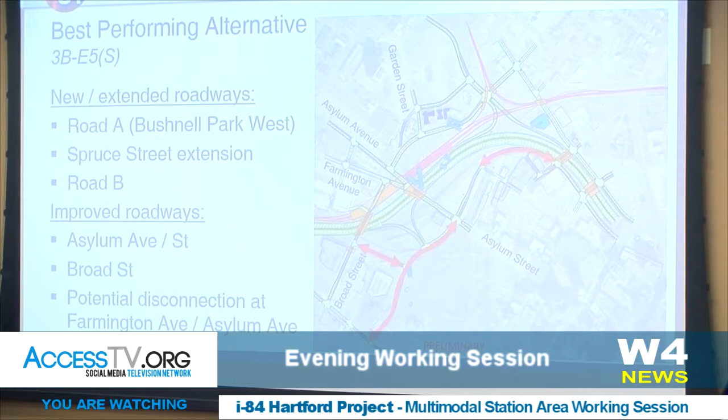So with that, I'm going to turn it over to Tom to talk about some of the ways we've been looking at this to help improve that network, things we could add, things to improve.

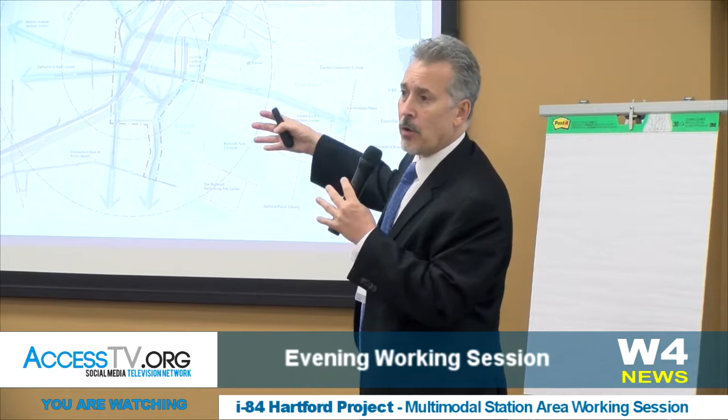There are many more options associated with making connections back and forth, and those connections are very important because they help establish a much stronger sense of place. You want this part of the city to not feel empty, but to feel very much a part of a connected larger city. We want to fill in this area in the middle. The highway comes through, the rail comes through. We want to create blocks, we want to create places for people to gather, we want spaces and streets for people to walk on. We really want to think about this as a new place and create that strong sense of space there.

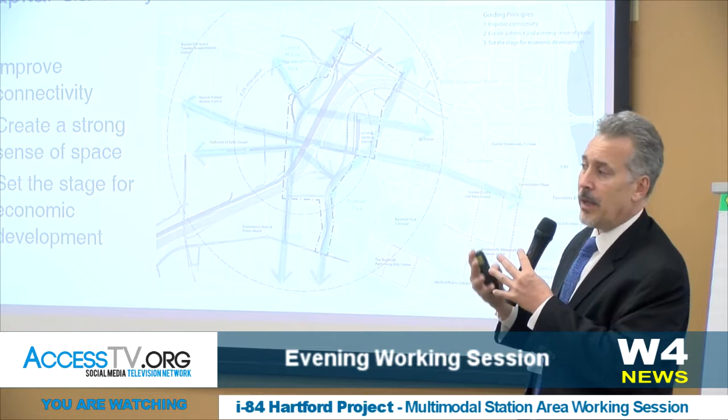That also sets the stage for economic opportunity, really taking what is a downtown that is strong, but enhancing that strength, and also the Hill District, which is also strong, and really bringing those two together, giving a space for development in the middle that can activate both of those communities and create a much larger connected downtown of the city.

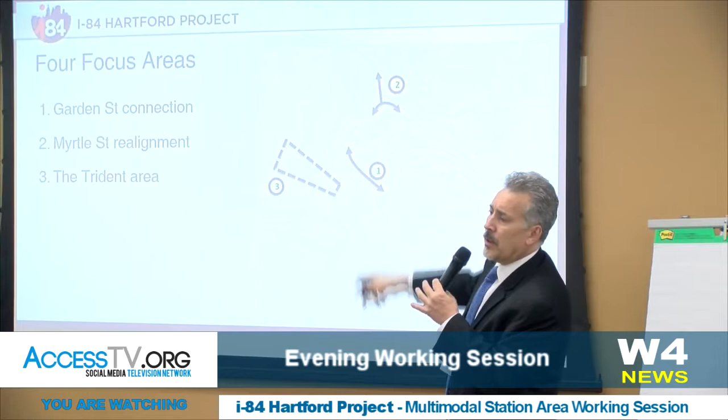In looking at the alternative, there are really four areas we've been able to focus on to think about ways to achieve all of those goals. The first is making a connection north of Asylum, between Asylum and Walnut, that helps build that network in—we're calling it the Garden Street Connection. The second is to reconfigure the alignments of the roads coming in off the off-ramps so we move traffic through the neighborhoods in the north area more effectively. The third is coming up with alternative approaches to how we might process traffic, but also create a great space in the area we all know as the Trident.

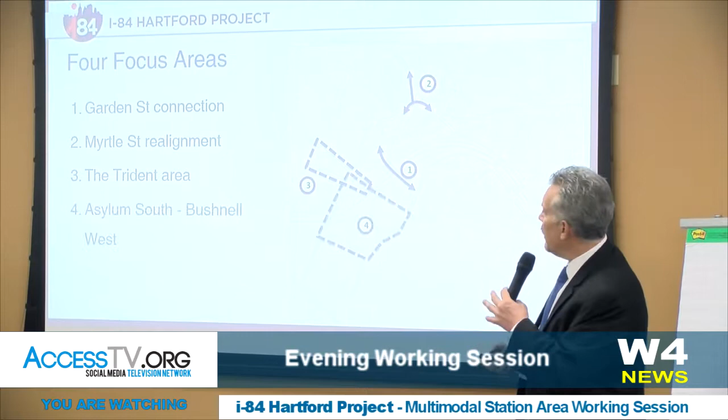And very much connected with that is the area where the ramps to the east are coming in—that's a whole new area, new roads. How can we make sure we enliven that space as well? So those are the four areas we've been looking at from a network perspective, and I'm going to walk you through, with Casey, all four of these.

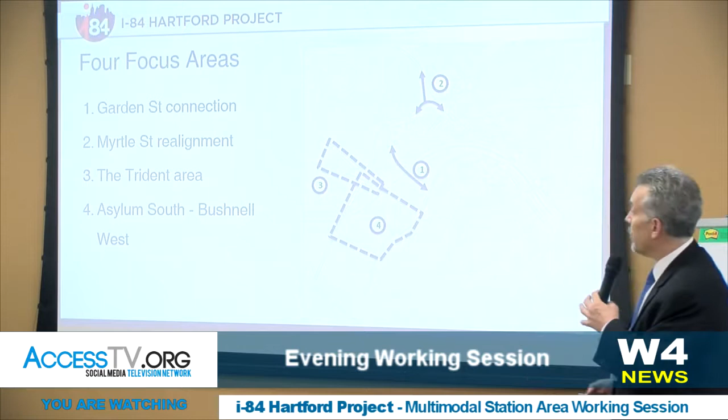So the first is this Garden Street connection. We talked a lot about the fact that between Asylum and Walnut, you really don't have any space to cross from east to west, and that's a long divide that really separates the city in this area. We wanted to make sure we could enhance those connections in a way that works really well for the local street character. Although it's a street coming from the Hill to the downtown, so it's on an incline, we see an opportunity for a local connection by extending Garden to the south and bringing it down, dead-ending into the current Union Station site.

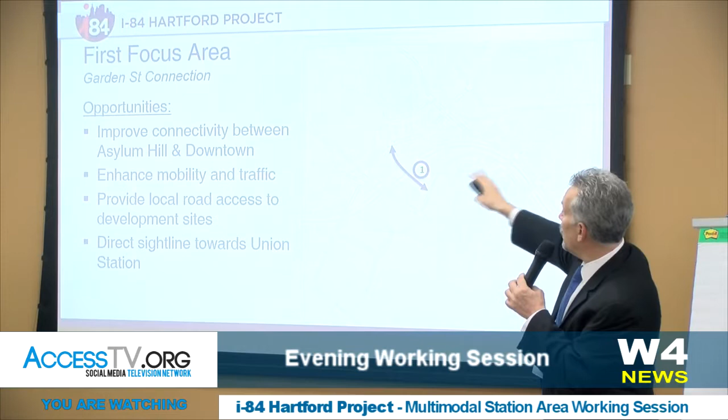We see that site as a very important economic draw for the community, and the Garden Street extension, in a lot of ways, enhances its ability to be a very successful place, and also sets up development just on the other side of Spruce Street around the road that may not otherwise be as effective. So we see some real opportunities by making this first connection.

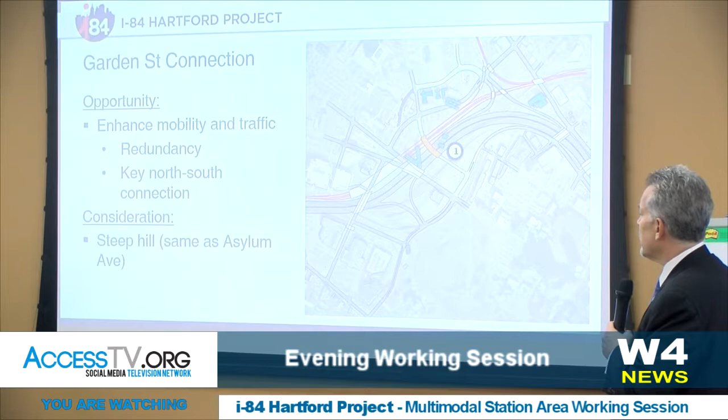Just to support that a little bit, I see some new faces here. This whole idea of creating a connection from Asylum Hill back down towards downtown really started because under the lower highway scenario, the existing way Myrtle Street comes down the hill can't function in the same manner.

So today, Nick, if you could zoom there on your map. Myrtle Street kind of winds down the hill and then goes underneath the highway. So when the highway is lowered, all of a sudden that street is at the same elevation as where the highway would be. So in order to create a connection, we now need to go over the highway and then come back down to meet these streets.

So we looked at this in a few different ways, and I think finally through the collaborative process, we reached something that we're able to make work from a geometric standpoint, because I think we all kind of knew the mobility benefits that were there to be had.

So to confirm what Tom is talking about, it's adding redundancy, and that essentially solves or really helps us elsewhere in the project area—a lot of the Trident area. This is where Asylum and Cogswell meet, where Farmington and Broad meet. That's a problem today; there's a lot of traffic going through there. So by adding this new way for folks to get north to south between the neighborhoods, it kind of pulls some mobility or traffic volume out of that really constrained area.

So what we came up with—we tried quite a few things that were a little bit more complex—and ultimately this relatively simple solution just takes Myrtle Street and makes it kind of the primary road coming off the ramps.

So if you come off the ramps and go straight, you'll essentially curve around on Myrtle Street, and then you can take your right up to Collins, which kind of maintains the way traffic today accesses St. Francis and other destinations in that part of Asylum Hill. The added benefit to us is it actually simplifies and improves traffic operations. We were taking people who'd come straight here and then have to immediately take a left, and now it's just one through movement. So all in all, sometimes a simple solution is really the best one.

Quick question: what prevents people from taking a right and going up that way? Nothing would prevent them if they were accessing that residential street to visit someone. Nothing would prevent you, it's more that the general layout of the street would discourage it. For example, Google Maps, if you were going to St. Francis, would send you down Myrtle and around Collins. It's really about that through traffic and trying to create a street layout that points you where the network wants you to be. So it's more of an encouraging design than a restriction, okay.

So with that, I'm going to turn it back to Tom, who's going to lay out some general opportunities for the third focus area. I think the Myrtle Street example is a good one of how we're trying to think about street orientation. A lot of these streets will have a lot of vehicles on them, but we still want them to feel balanced. We want people to feel like they can walk through these communities, that we can bike through these communities.

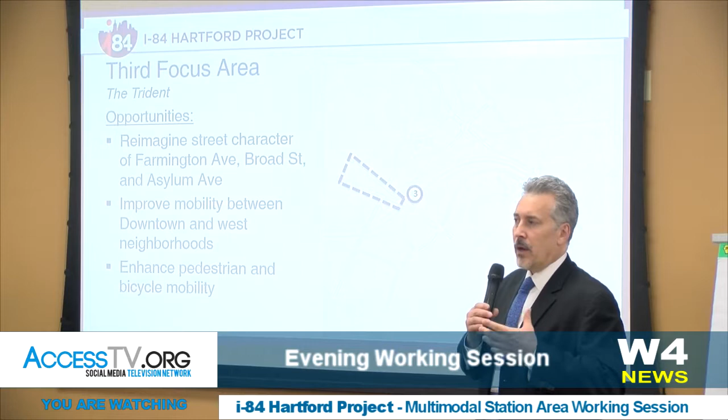In hearing from the community and our stakeholders, we recognize the Trident is very complex, and we're really trying to understand it. We wanted to make sure we thought through a series of possible options that might enhance all of these characteristics, so we have 4 of them that we want to present today for you to listen to and give us your reaction to.

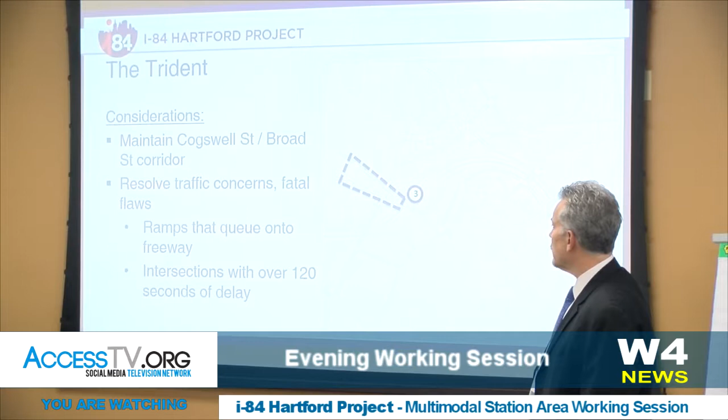As we weigh these options, there are a couple factors we want to take into consideration. There's the key connection along Broad Street into Cogswell. And as we weigh them, we've identified through our previous analysis things that could be fatal flaws—for example, if a ramp were to cause a backup onto the highway, we'd view that as a fatal flaw. Same thing if individual intersections have over 120 seconds of average delay, meaning the average person rolling up to an intersection would have to wait through an entire traffic signal cycle. That's also viewed as a fatal flaw.

So as we evaluate these 4 options, we'll go through them individually. The first is what we call the discontinuous Broad Street, which I mentioned a few slides ago. We've also looked at extending Farmington Avenue down to the south—what if it didn't come together with Asylum? We've also looked at providing a roundabout at that intersection, as well as shifting where Asylum and Farmington come together a bit to the west, separating the intersections out more.

Casey, just to back up a minute, what are the reasons that we're actually looking at these different options at the Trident?

The short answer is it does not operate well. The traffic operations today are very poor. People who drive there, particularly during the PM peak period but the AM as well, the intersections tend to back up into each other, which causes snowballing delay, where you can try to go through there and end up sitting through several red light cycles just to get through one intersection, then get stuck right at the next intersection.

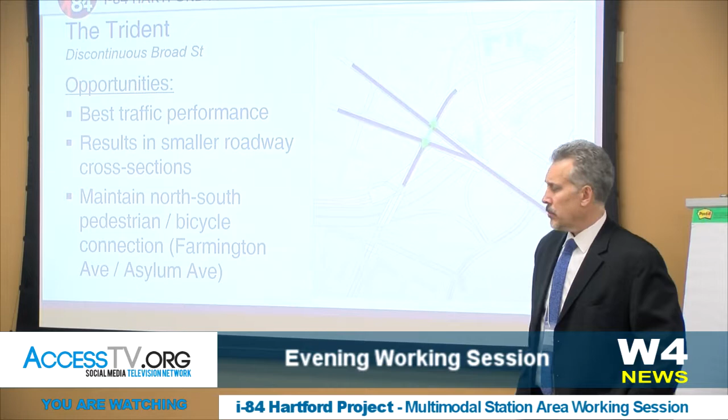And then the key point we like to make is that there would still be a north-south bicyclist and pedestrian connection between these two streets—it would only be cut off to vehicles. In fact, like Tom mentioned, that space that's currently not usable, there could be an opportunity to expand that, kind of expand the two parks currently on either side of Broad Street into one nicer place.

We've been presenting this for a while now, and there's been some pushback on the idea of closing Broad Street, and that's something we wanted to continue the conversation on, especially with this new addition of Garden Street—the idea I presented a few slides ago, looking to make that connection between Spruce and Cogswell Street. We think adding that can help mitigate that closure, because now there's another way to get from Frog Hollow up to Asylum Hill. Does that make sense to everybody?

So show me how you get onto 84 with that piece being closed off. Where are you coming from? Well, let's say the Hartford. You'd be coming down Cogswell Street, you can make a left on Asylum, make a right down this new road,

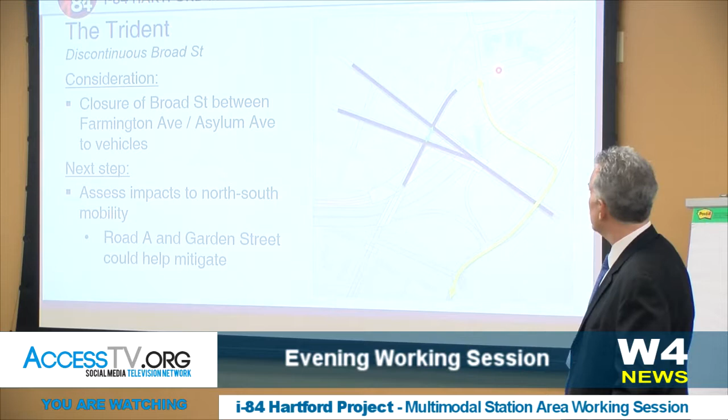and come onto the ramp to go east. Okay, how about west? I need to zoom out. So it depends on which lot you're coming from, but essentially the answer is you get onto Myrtle Street or to Cogswell Street. The ramp is right up here.

What about the fact that you're sending a whole lot of cars back into Hartford as all the cars are trying to get out of Hartford? Sure, that's a good question. So we think that the way this street is now set up, you'll have most of those cars coming out of Hartford, a lot of them will be making this turn down here. So they won't really be conflicting.

The biggest movement is for folks to try and get on I-84 East during the afternoon, because not only does it serve I-84 East, it serves I-91 North and South as well. So we think essentially what you'll have is cars coming from Asylum Hill or Aetna or Hartford coming down and making a right. And a lot of that traffic from downtown will be coming up here and taking a left. That doesn't really put them in conflict.

Exactly, and so if you're coming down this way, it's basically two rights to get to the ramp, whereas today you have to come down here and turn left, which is one of the big causes of the poor traffic operations that we see today.

But one more question. Hi there. I have a question about a lot of West Hartford being reached by the Asylum exit. I'd say everything from Asylum north is reached. So just show me how do we get to West Hartford from the Asylum exit?

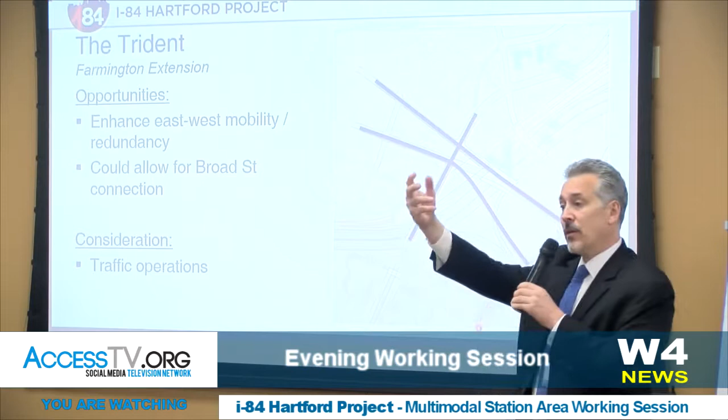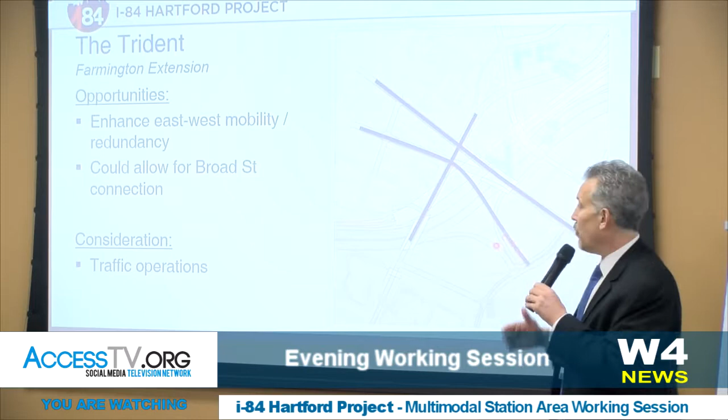By extending Farmington, you're changing kind of the character of the neighborhood. You're also changing the way people may travel through the neighborhood. It's an intriguing opportunity, one that we liked and continue to like because of the ability to bring Farmington down to Bushnell Park West, creating a really great development opportunity, really strengthening Farmington as this kind of gateway roadway.

The goal of trying to connect Farmington all the way down to Bushnell and still continue to have Broad and Cogswell connect is also very challenging, though, because the distance between these two intersections, Asylum and Farmington, is still very close. And really the larger problem is the queuing and the backup at that location. So it may well be that the Farmington extension, while it might be a really great idea and could work, it may actually continue without even having this connection as well.

So the initial intent of doing it to keep the connection, it may still be a great idea or a way to approach this, but it may also be something that we ultimately do so these two roads parallel each other all the way down to Bushnell Park West.

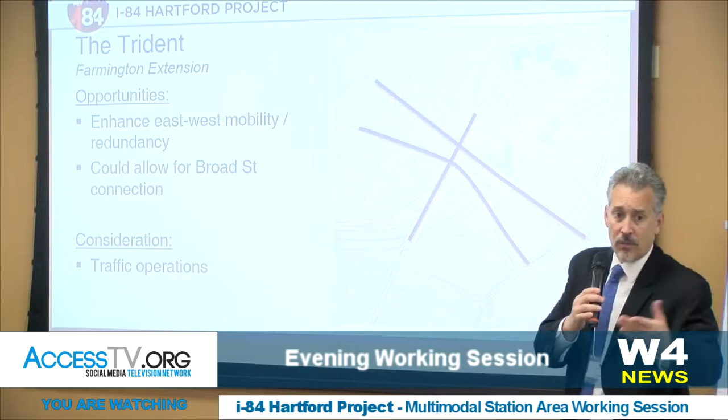I don't think it works quite as well from a traffic operations perspective, and that's something we have to look at more. But what we're trying to do is come up with ways to fix the travel movement, but also create great places. The extension of Farmington has real value, especially in thinking about how to activate this space to the south.

Tom, you mentioned queuing at those closely spaced intersections. I assume what you mean is vehicles in the north-south Broad Street section, waiting at lights, spill back through the intersection and block it. Is that more or less what happens? Correct.

To make Farmington happen, one thing we've been looking at is relocating the ramping system on the east side of the highway, pushing it further south where it will connect to the extended roads down to Capitol. The reason is to create enough space to bring Farmington through, and also to create opportunities for open space and development in that area.

Essentially, like Tom said, our next steps are really sharpening our pencils and taking a close look as to whether that type of shift to the on and off ramp intersection is something we could live with from a traffic perspective, in terms of whether the ramps would potentially queue back onto the highway.

So the third thought process was, can you reconfigure the way Asylum and Farmington come together? A lot of people think roundabouts are an interesting way to process traffic, often very effective, depending on the volumes and space you have. Based on community input, we started thinking about whether there's a way to process people through the Trident using a roundabout or traffic circle.

But Casey, maybe you can go into more detail. That's absolutely true, and the two other benefits we touch on are the potential to control speeds - as almost a gateway, you need to slow down to circulate around the roundabout, which communities have found helpful on roadways entering a city. And then there's safety - single lane roundabouts have been found to reduce crashes compared with a signalized four-way intersection.

So we took a look. We totally understood why people wanted us to examine this. In terms of traffic volumes, we're almost double the threshold for what the maximum is for a single lane roundabout. So we had to take a look and add some lanes to ensure the roundabout would work successfully. Unfortunately, what we came up with is pretty complicated.

So as you can see, it sort of looks like a mythic sea creature. As complex as it looks from above, you can imagine as a driver trying to figure out what lane you needed to be in, where you needed to get out, would be really challenging. On top of that, this would really impede mobility for bicyclists and pedestrians - hard either as a cyclist to navigate, or as a pedestrian to cross some of these approaches with multiple lanes that theoretically wouldn't have any stop control.

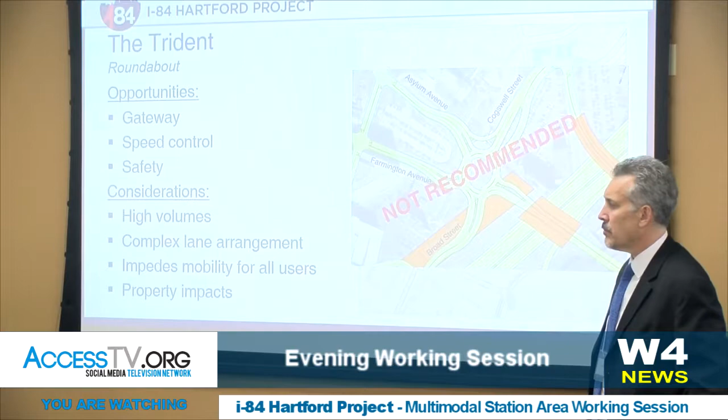So ultimately our thought was that it's really not recommended. The complexity and the impingement upon mobility for bicyclists and pedestrians means this isn't the best place in the project area to have a roundabout. We're going to continue looking at different intersections that might work a little better.

And Casey, isn't there pretty high pedestrian demand at that intersection as well? Yeah, even dating back to the hub study years ago, the idea of better pedestrian accommodations from Asylum Hill, both along Asylum and Farmington, down towards downtown, was always a big priority. So yeah, that would be a challenge here.

I think the notion of trying to create the roundabout or traffic circle in that location was to try to create the east-west connection and also alleviate traffic at the Asylum Farmington interchange. It spurred a lot of additional creative thinking about whether there are other ways to solve the problem.

The members of the team put their heads together and said, what if we shifted the Farmington Asylum Y connection further to the west, pushed it up the hill a little further, far enough from Broad Street and Cogswell that we could continue to have the Y, but then also have it feed into an east-west connection. This is something we've come up with relatively recently, but it has some really interesting merit and definitely warrants further consideration.

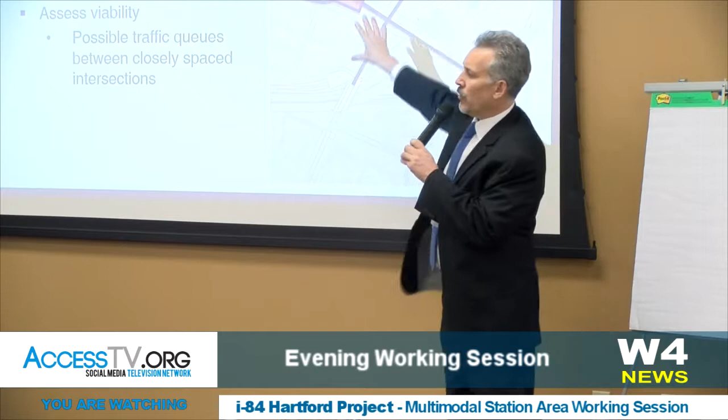One other point is, as you think about the larger network, some of the new streets we're going to build won't have as much traffic. So these are all trade-offs, and you have to think about where you're trying to process the traffic through. More traffic up here means less traffic down here. There are ways you can balance where you're trying to move automobiles through the system, and what are the best streets to do it.

Another point is these are going to be new streets, so we have the ability to design them to accommodate maybe larger volumes and more lanes, in a way that makes them great urban streets, urban boulevards. We can potentially do the same here. So part of the decision has to be thought about in how well it can be designed.

So we've got basically four options. There are a few other permutations of these, but we want to have a little discussion before we move on, because we know this is such a big topic for a lot of people who live in the city and deal with this intersection daily. Are there any of these that jump out at you as options you really like, ones that you think we shouldn't even be looking at anymore?

Yeah, I hit this intersection every morning. I actually like the western shift, especially if we can extend Sumner all the way to Farmington. I think that would work really well, because the amount of traffic that piles up turning off of Asylum onto Cogswell, trying to get across to Broad to get onto 84, is really a nightmare, and sometimes you're caught in that intersection with everybody flying down at you. So if it went a little further back and the streets could accommodate more cars, it would probably work.

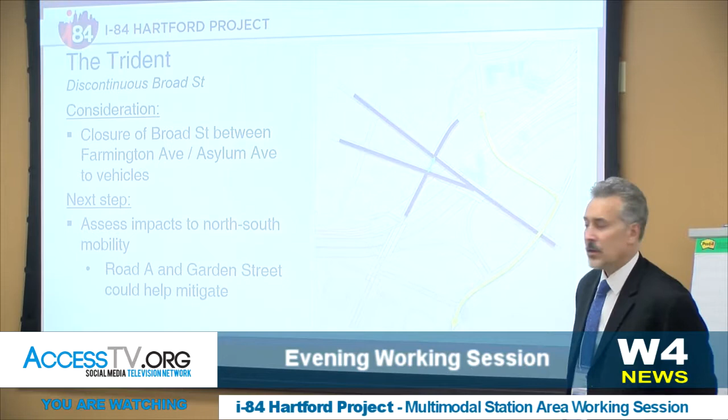Some of that might be, for example, coming down Asylum from West Hartford and wanting to go south on Broad Street, in which case they just have to take a right one street sooner than they do today. Or if you have people coming from the neighborhood, instead of going straight down Capitol Ave, they might take the Garden Street extension and then take the new road on the west side of the park.

So most of the traffic there is going east-west, but there is a substantial minority that wants to go north-south. I know Jennifer came in after you presented this concept, so just recap that new north-south connection with Garden. I think it's important to show that again. Sure, so the idea here is that Garden Street... I'm going to go back a few slides just to the talking points.

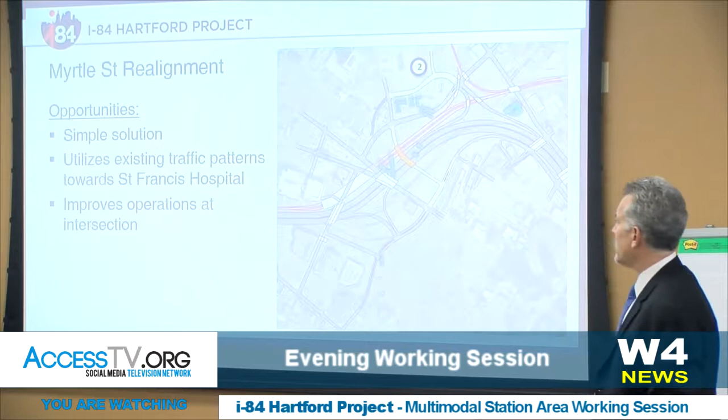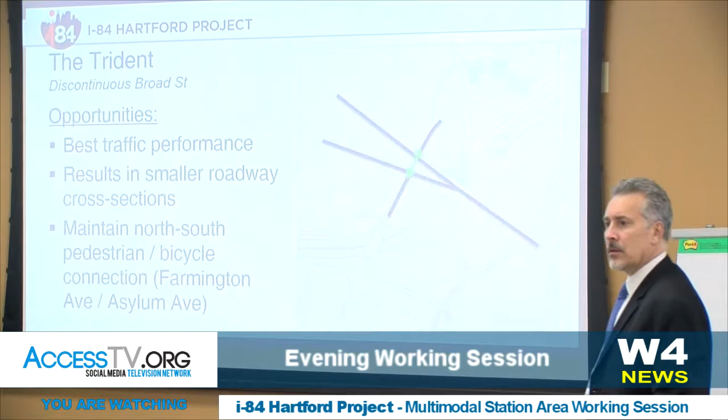Okay, were there any other thoughts on this one? Oh, you had a different one? That's fine. I'm kind of intrigued by the extending Farmington Avenue option, because you get to keep Cogswell, you keep Broad Street connected, and you then give those of us driving either direction two streets to choose from to head either way. Both streets get us to the new exit and entrance ramps. So I'm kind of intrigued by this one.

Sure, I just want to add that our preliminary traffic analysis indicated we might need as many as 8 lanes to manage the queuing on this roadway segment between Asylum and Farmington. So I don't know if that changes your answer.

Well, have you priced the options? I mean, is there any kind of cost? We don't have a price comparison. The Farmington extension would add a separate bridge over the highway, so that might determine a slight difference, but in the order of magnitude of the project, the difference is probably relatively small between these respective options.

Casey, when you say 8 lanes, do you just mean the Broad Street section between Farmington and Asylum, or the whole thing? Just 4 lanes in each direction on this segment here, and then the approaches are significant too as they lead up, but none of them would add to 8.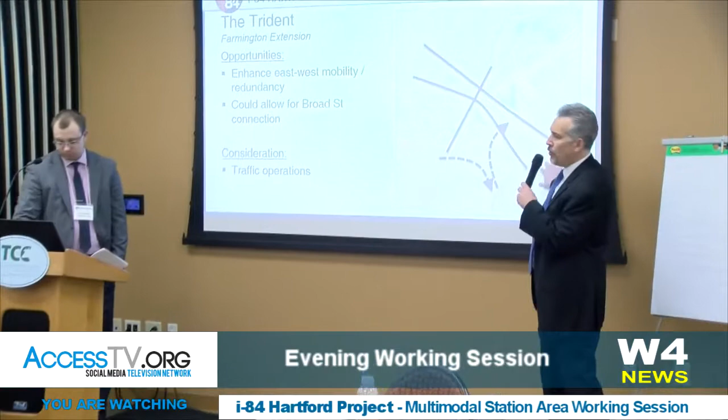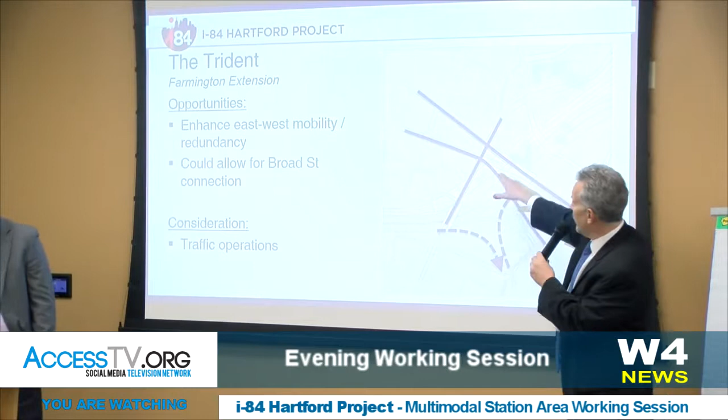I think one of the things we're trying to recognize is if you have the ability to build new roads in this quadrant, you really want to take advantage of Bushnell Park, and we want to create opportunity there for Bushnell Park to be a place where people gather, but also as a setup to extend your connections between the south and the east and the west. And the reason Farmington is intriguing to us is it allows for this space to be a site that really can have new development take place in it, and possibly even the space on this side.

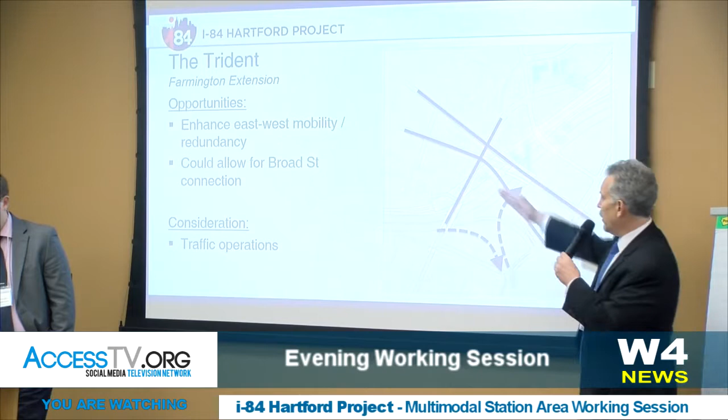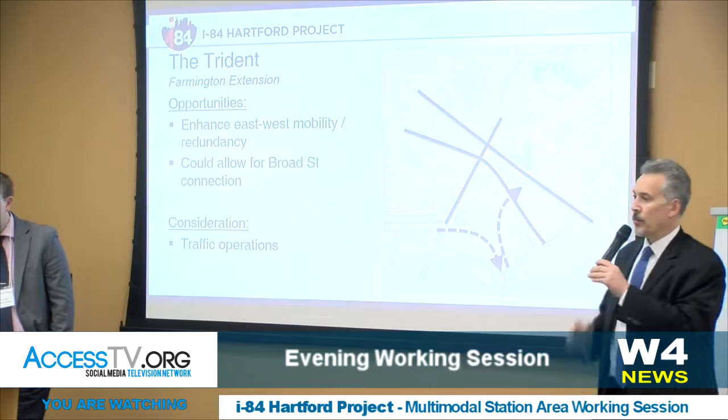With the ramps coming down in the middle, we have to think a little harder about how we can, if we bring the ramps in, create these as really strong development sites. I think our first thought is, if we can extend the network, we have a better opportunity to do that. If we can't, we have to think about how we can create a really great street that fronts on Bushnell and allows for those ramps to come in, which I think we can do, but that's just one thought with Farmington.

Okay, well, we can circle back to trident options later if anyone's interested. I think this is probably the intersection treatment that challenged us the most as a team. We've been working really hard on it, and as you can see, there's a lot of trade-offs to consider. But in the meantime, we still want to consider the relationship of Asylum Hill, the ramping system, and what we can do to that area so that when those ramps do touch down wherever they might be, that's just not a barren space, that we can activate it and make it part of a nice urban space.

We also want to make sure that all the streets are right sized so pedestrians can use them. We want to make sure development is teed up for the city. So there's a lot of competing interests in this whole area, and I think there's some ideas that are intriguing to us that we're going to continue to explore, and I'll let Tom go ahead and tell us about those.

So if you remember back to Mike's very first slide talking about all these different areas, this is the fourth of four areas where we're trying to refine that roadway network and make some key strategic additions that can help increase mobility. And it all works as a network.

One area we see as vitally important is the space that separates Bushnell Park from the north, from the west side of the city. If this is a big open space that's not activated, it will feel like a divide within the city, and it's right at Asylum, an important corridor. What can we do to really make a visible front door with the park views, to take advantage of Bushnell Park?

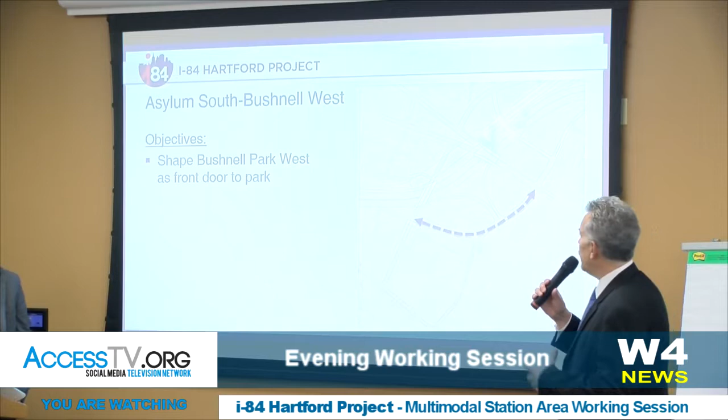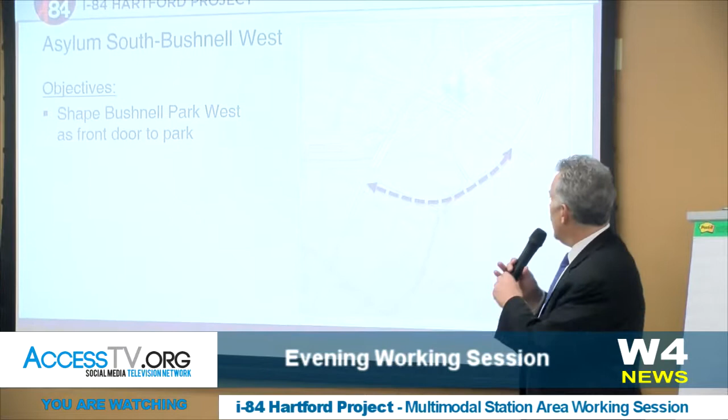A couple of moves we thought might be real critical and helpful: first, because the new Road A and Road B are new streets, we have an opportunity to make that a really great place—not just a street that connects people or handles traffic, but a great urban boulevard that fronts on a great park. Because it's a new street, even if it handles a fair amount of traffic, it can probably be well-designed to handle a lot of pedestrian and bicycle activity, irrespective of lane width or number of lanes for cars.

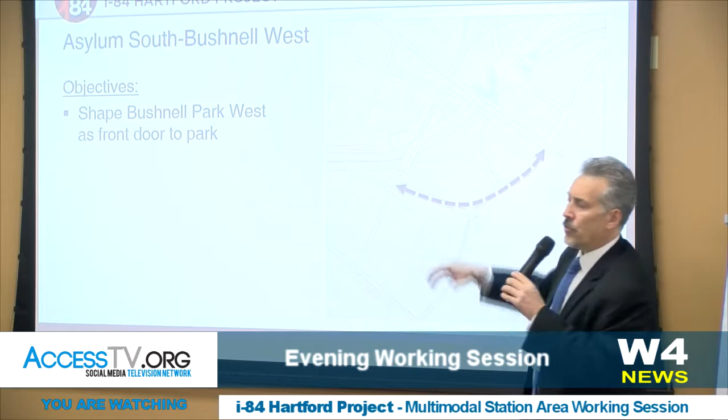Another thought is CTfastrak, bringing it into downtown Hartford as another piece of this transit mobility center we're talking about. There's an opportunity to integrate CTfastrak with this Bushnell Park West Road design. So while we call them Road A and Road B, we really see this as a network of new streets, and we have to think carefully about how they're designed.

The second idea, which you actually brought up in your question, is if we shift the lanes over and connect them directly to the current off-ramp lanes down to Capitol Avenue, how does that free up more space and make the extension of Bushnell Park into this area really important—especially as we think about the Capitol itself, the view shed, the view corridors, and the open spaces we could create. We want to optimize how that fits in.

This shift of the highway ramp, although challenging because it really inhibits the queuing distance coming off the highway—something we really have to consider—has advantages from a placemaking perspective that we're really interested in.

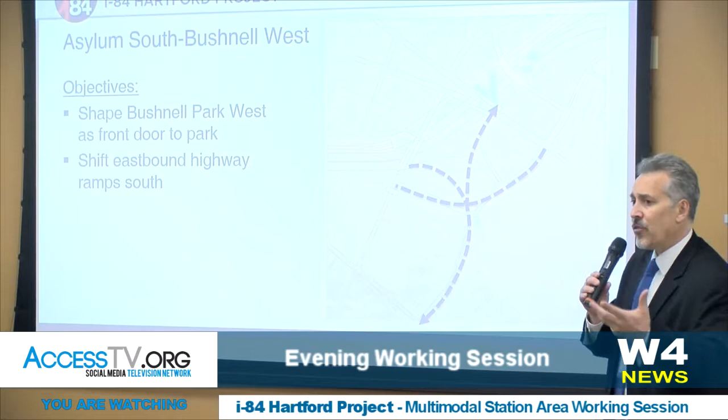The third would be, in some manner like the extension of Farmington, or maybe even creating a local road under some of the scenarios we're discussing, can we replicate this extension of Garden on the south side of Asylum and create these bookended roadways that take some load off Asylum traffic, create more opportunities for people to move through the community, and create a hierarchy of roads that begin to make it feel like an urban place, an urban network.

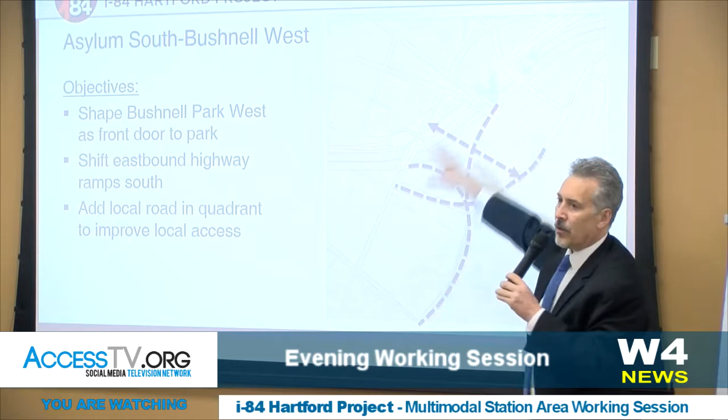When you have this many roads connected with development moving along them, I don't think people will still see this I-84 area as a divide between downtown and Asylum Hill, and that's what we're really trying to conquer here. So we have to deal with topography, and one of the best ways is to make as many connections as you can. Those are some thoughts about how we might activate this space as a critical piece of the entire network.

There are obviously challenges associated with this, not least of which is the traversing of this road as a pedestrian. It's going to be a steep street, as is Asylum, as would Garden be. So we have to make them really great streets.

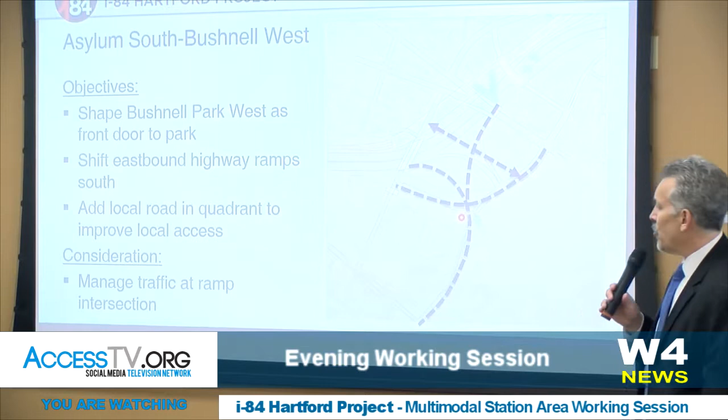The shifting of the highway ramps is a big challenge, something we can't take lightly. The fact that they come into a four-way intersection now makes it even more challenging. So we're not making it easy on our traffic guys to try to make this happen, but it's something to consider.

So what we wanted to do is make sure that as this process moves forward, because there's still a lot of design that needs to happen, we don't want to put ourselves in a situation where we put out options and then have to preclude them. So what we're trying to do is come up with some initial thoughts, diagrams of how the network might work under different scenarios with the Trident.

This is the first scenario: the interruption of Broad and Cogswell. In that regard, if we can move the ramps, we could create a local street that just connects in between Bushnell Park West and Broad.

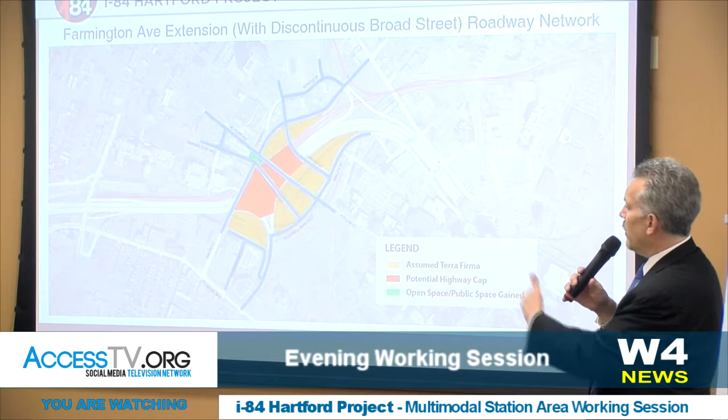Under the notion of extending Farmington, we chose in this pattern a design where we may have to look carefully about having Bushnell Park West extend all the way with this connection in. But there are still some real interesting opportunities for creating an extension of Farmington, changing the complexion of how the whole Trident works, and really activating the space.

And then the third option would be if you do push the Trident to the west. Again, now you've really got a grid. You can see how you've got all these different areas that can be shaped, created into street blocks, and a grid forming in this network of the whole downtown and the Hill District, kind of connecting together.

So our next steps on this would be to really assess the viability of the relocation of the ramps. What does it do to traffic? How can that work? Under what scenarios can it work with the Trident? And they are definitely connected, and Garden really is part of that too. When you start thinking about the whole network, how does traffic work? That's really the most important part.

And then I think we have to start thinking about how this roadway aligns. Bushnell Park West, what does it look like? Where does it touch down? There are vertical issues too, because you can raise this road up, you can push it a little further to the east. So there's a lot of ways in which we can play with this extension road and the Bushnell Park West road to really make it into a great street.

So our next step is really to dive in a little deeper, look at this in section and in plan, and think about how CTfastrak might align with this, what this road would look like, whether it's an active pedestrian place, is there a cycle track on one side? What does the public realm look like, even though it's a boulevard? Is it a central tree-lined street? Are the trees on the side? Are there wide sidewalks, that kind of thing. I think that'll give everyone a better sense of what we're trying to create.

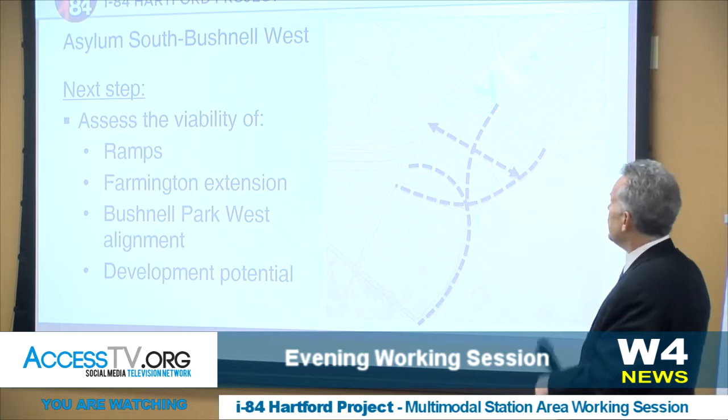Great. So we do want to move on in a minute to station areas. That's another big piece, because if the street network wasn't enough to deal with, we also have to figure out how it relates with the station.

But just to recap here, how do any of you feel about the north-south opportunities, or even the east-west opportunities that are created with some of these new streets? Did we hit some home runs here? Are we still lacking in connectivity? Any other thoughts on that?

The more north-south, the better.

Yeah, and how do you feel about the Garden Street connection to the new Bushnell Park West? Which one was that, was that number 4 that came down? So the Garden Street connection is actually the first one we showed, the road to the north of Asylum. Garden actually dead ends at Cogswell now, or Edwards, I guess, at the moment. And what we're looking to do is pull that down and have a dead end right across from the current Union Station, kind of replacing Myrtle but pulling it in closer to Asylum.

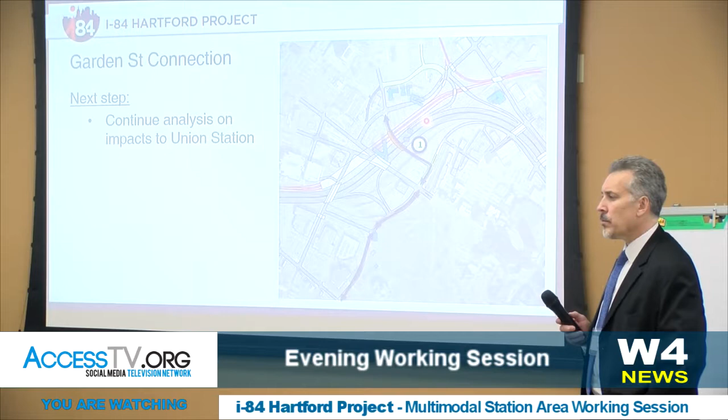Oh okay, so that hill where the Capitol West building used to sit, is that going to be somehow leveled? How does it work with that street coming down that way? So the old building was basically right where my cursor is, so it's really the space that it occupies. The railroad would be reconstructed there, and the highway would actually be lowered pretty significantly. And then on the left side of the railroad corridor, as you're looking, it would be like a retaining wall up to the level that the ground is now.

Walkability-wise from the station up this new Garden Street back into that neighborhood, it won't be as steep as it is now going up around the railroad tracks by Myrtle. It would be a pretty similar grade to Myrtle, but there are some different locations in play for the relocated train station that, if you're looking at a walk from the station to Asylum Hill, might actually make it easier just because of where the new station might be located, a little closer and up the hill.

I'm sorry, I'm really visual. Where are you thinking for the new station, just with this particular road configuration? We actually have a whole hour conversation on it. I couldn't possibly do it justice in one answer. All right, so I will have you do that.

So it sounds like that would not be as steep, so those of us who like to park and travel will be fine getting up that hill. It would be as steep as Asylum is today, so it's generally traversing the same hill. Asylum Hill is sort of the same elevation over here, and you're coming up from the bottom, just a little more direct. I think it would feel more directly connected between the hill and downtown.

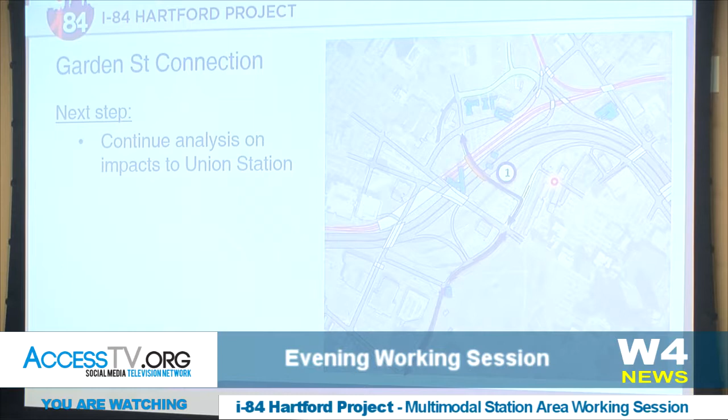I'm not sure how I'd answer the question about whether I'd like that north-south version. With that whole area, if we're making it more walkable for those of us who don't pay to park down there and travel, that would work. But the more connections we have going north-south would be great, because Sigourney has a lot of traffic, Laurel has that cutoff, Sisson is a nightmare. Sometimes you don't want to go directly north-south, you want to go north-southwest, so more options to go north-south would be great.

Sure, and we've been focusing mainly on this area today, but Laurel Street and Sisson Avenue could also be changed pretty significantly by this project. Sisson Avenue, I would think, pretty much for the better - I think it would see a lot less traffic as a result of the change in the western interchange options.

Just a question - is the east-west traffic that's closing down the intersection at Broad and Asylum 24/7, or every day, or just during certain times? Is the traffic all the time, or are we accommodating just rush hour? You're right, it's not 24/7. You can go through there at 3 a.m. and there's pretty much nobody there. At 12 noon there's a decent amount, but it's not going to back up very far.

We're doing it for about 5 hours a day, give or take. But those are 5 hours that it could back up to the freeway, which is a major safety concern of ours. It does, and that's a problem - we have spots on the freeway that are 4 times what the statewide average is for crash rates.

So out of the 5 we're presenting, 3 have been developed because of input we're getting from stakeholders as well as the city's consultant. We do have evaluation criteria. This is the evaluation criteria we feel is critical to start identifying and formulating your opinion on how well each of the concepts fits on the site.

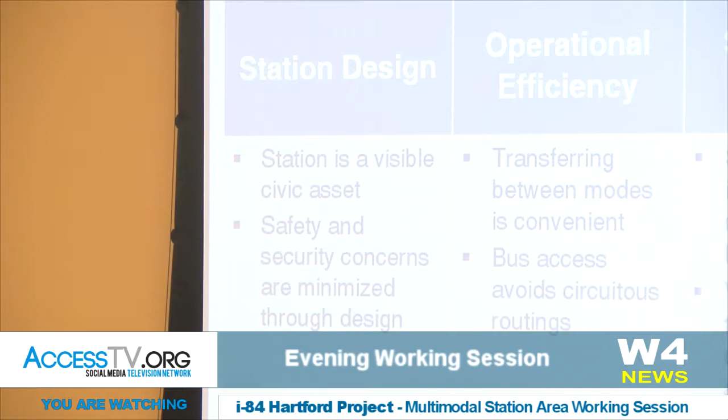I'll have one of you go over a little bit, but basically we're talking station design, operational efficiency, site context sensitivity, how well the station supports economic development, and walkability. We've heard a critical need that the station needs to be walkable and bikeable, so keep that in mind as you're reviewing the station concepts.

I won't review the great goals we've got up here, but really what this station wants to do is set the tone for the new transit district we're creating in the master plan, and the opportunity to help Hartford be more resilient long term for the economic challenges it has today. How can we create a district that's going to attract development? How can we create a district that has a great iconic train station that's a piece of architecture you can stick in the ground and say this is the new district we're creating here day one?

And how can we use the public spaces around it, consistent with great train stations around the world, to have these great civic spaces nearby that help set up the experience both from the public side, but also as you arrive from that station, to create a gateway here in Hartford. That's really some of the goals we're trying to assemble here today, putting in front of you: how do we make that great piece of architecture that's part of the civic fabric and helps set up the tone for the new district we're creating. Thank you.

So a few things as I go through the concepts, just so people understand: 4 out of the 5 concepts will require phasing.

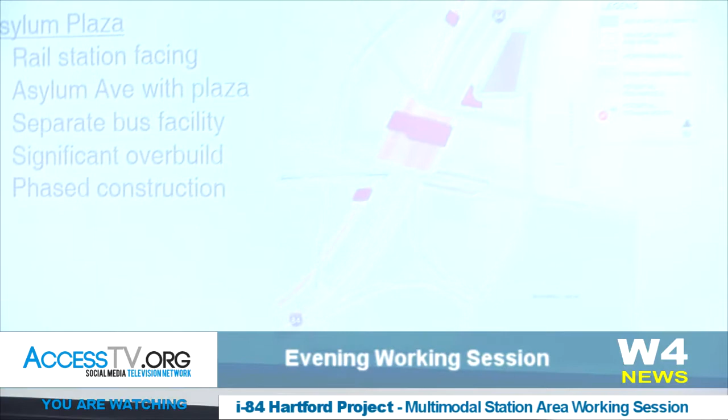By phasing, what I'm talking about is at the beginning of the project, the construction of the tracks will go first. The tracks will be moved from their current location, approximately 2,000 feet west, and at that time you could construct the rail station.

Any of the concepts that rely on an overbuild over the depressed highway will have to come later, once the highway is lowered. At that point a cap would have to be constructed, either on the north side or the south side of Asylum, and then you would have your train and bus facility over that cap. So that could be several years in terms of a phasing approach.

When we look at the concepts, the icons are going to be the same. The purple reflects the train and bus station depending on the scenario. In this case, this is the train station, and this would be a separate bus facility. In this concept, we're talking about the bus facility just northeast of the train station.

The tracks are here in case you're trying to orient. Let me try to orient you: these are the new tracks, this is Asylum Street right across, this is Spruce, the existing Union Station is over here, and Cogswell is the street to the west. So the train station would be planned with a plaza in front, fronting Asylum.

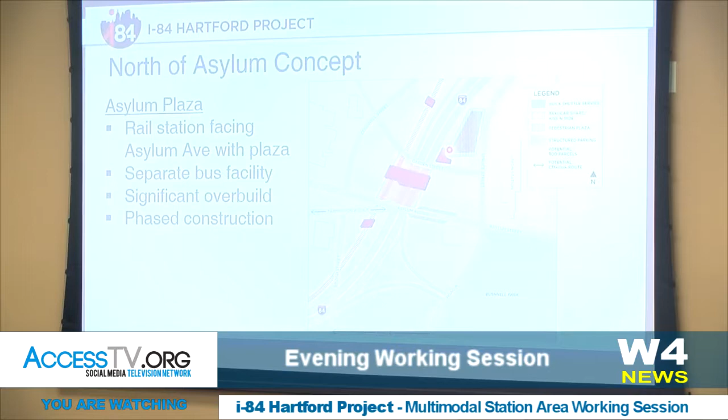Yeah, so as we look at these alternatives, some variables you're going to see: one, do the bus station and the train station really feel like one, or are they more separate from one another? Another variable is whether the stations are built over the highway or on solid ground beside the highway. It's going to be very difficult to get private sector development built over the highway just because of cost premiums.

If we've got the station and the bus facility over the highway, that probably frees up more land for private sector development, but it adds cost to the station. So there's a trade-off there: it adds more cost to the station, but leaves more land for private development.

So what you sort of see here is the station in a very prominent location on Asylum, and I think we could have a lot of further discussion about whether there's a plaza or a park space in front of the station, and what's the right dimension for that.

Probably here it's shown about 100 feet. That might be, in my mind, a little bit too far back, but the idea is a strong one, as I think Bill talked about earlier.

The way the public space is incorporated around the station is one of the things that makes station buildings prominent public buildings. Here we've got the bus station not over the highway, so that means it's occupying land that otherwise could be used for housing, mixed-use development, or workspace. But it probably also makes that facility less expensive.

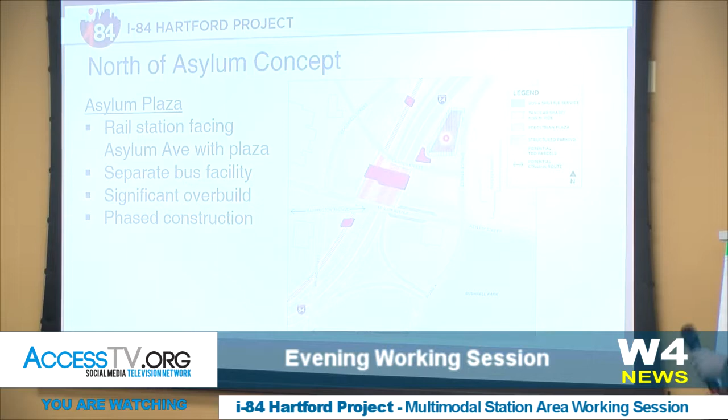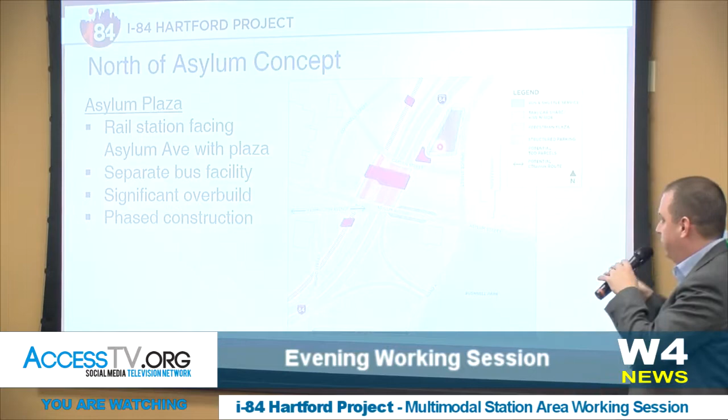In addition, just to amplify what David's talking about, this scheme gives opportunity to have development on both sides of the station, fronting on Asylum. So it creates that continuous opportunity all along the Asylum frontage to have activation along that northern stretch, and have potentially even lobby entrances that access directly into that station, like Grand Central in New York, to have that compact development right around the station.

Question over here. I had a question about the kiss and ride - so the only access to it is on Garden Street? We're off of Spruce, yes. Garden Street would be your access point for the kiss and ride. Is that a parking lot or? No, it's 30 spaces we're estimating for the kiss and ride, the drop off. For a parking lot, like? Right, like a surface pull off.

But yet the bus lanes on Asylum could basically also be used for drop off, like they are on Spruce Street. We understand that the traffic patterns would be such that we probably wouldn't want the drop off along Asylum. We would really want to pull that into the site, so we're really anticipating just the local transit buses stopping along Asylum.

We're also suggesting in this concept that the bus traffic comes in and off of Spruce Street into the bus lot. It just seems like the kiss and ride is a little out of the way for cars, they have to go kind of around and stuff. You'd come up to Spruce through Garden, or off of Cogswell onto Garden, yes.

But coming down Asylum Avenue, you'd have to take a left-hand turn, and it would probably be easier. I'm just saying, I see the kiss and ride cars all the time, and they take the bus lane on Spruce Street now, all the time, like full. Well, that's why we'd like to keep them separate, right? I'm just saying it's going to be out of the way, easier to just drop it off on Asylum Avenue and not try to take a left-hand turn. Something to consider, because the only way to get there is a left-hand turn lane. I think. All right, thank you.

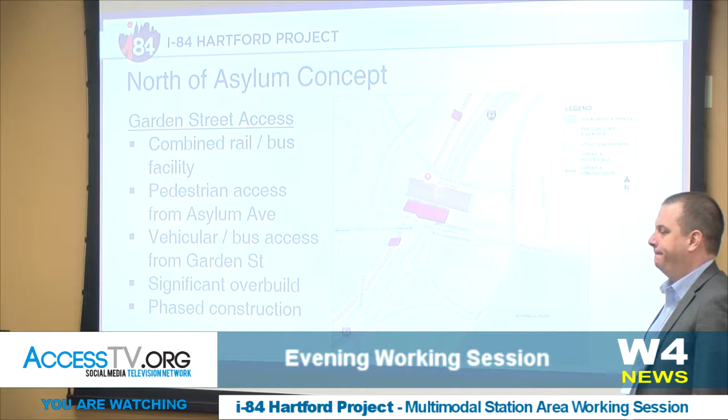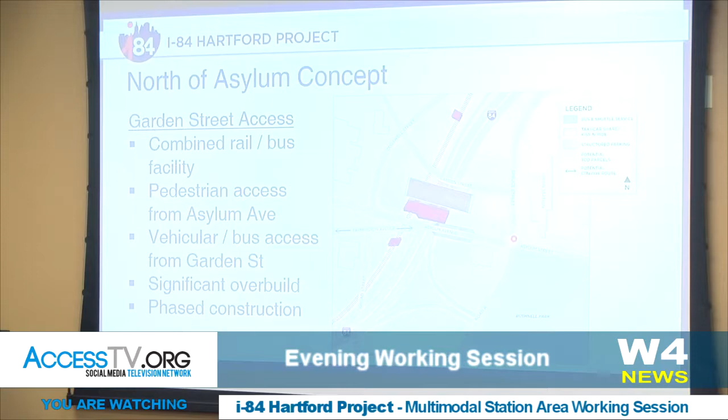Well, the Garden Street access point would definitely be an alternate to using Asylum the entire distance. Garden Street mainly serves as an access point. If you're coming up or down Asylum Hill, it's a nice little east-west route, but it doesn't go anywhere beyond Spruce Street, so traffic volumes there wouldn't be terribly high—similar to the way Myrtle Street is today going onto the highway.

Just to reiterate what Gina said earlier, these are very diagrammatic—I don't know, that's maybe 250 feet. It's perfectly possible that at the level of building design, with the size of our station, we could incorporate a plaza that was deeper at one part of the site while having a wider building at the other part. So I think all of these ideas can be incorporated ultimately.

We've simplified this for graphic purposes. We really have more details in our drawings. If anybody's interested, they can come up afterwards and see more detail in terms of how the buses are laid out and how the station building is laid out. But this is for presentation purposes.

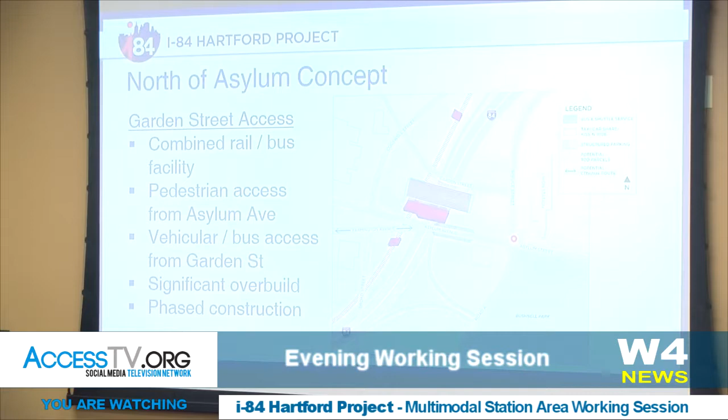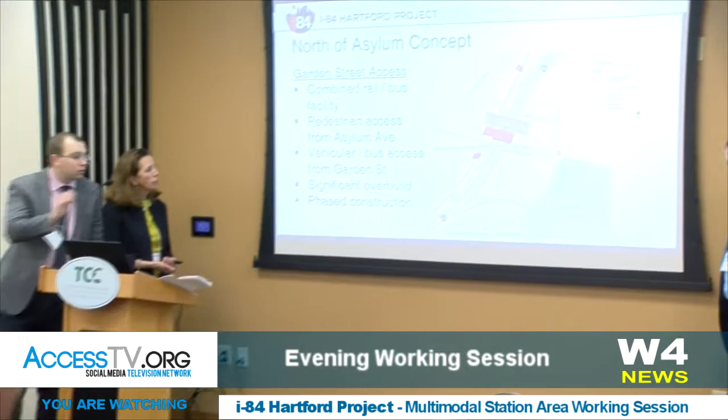I guess I have an overarching question: if you're taking out the access onto 84 West and replacing it with the Cogswell entrance, the folks that access that now—I'm missing how they're going to get there. Are they going to get there through Garden Street and then rolling around? Garden Street, as you guys envision it, is going to be pretty quiet. I'm not getting how they're going to get from, let's say, Metro Garage to 84 West.

Maybe I'm missing it—what's Metro Garage? One of those garages around the Civic Center. Okay, so up kind of where the legend is, almost. Yeah, that makes more sense. Right now the entrance is right there where the cursor's at, so if you're right there, your best bet would be just to go up here to North Chapel and then right up to the right.

Would it? Yeah, because otherwise that would be some left-hand turns. It is left-hand turns, and the other way would be the right-hand turns. So you could go either way if you want. The shorter route would be to the left. I'm just putting that in terms of activity on Garden Street.

That, to me, sounds like there'd be a lot more traffic there, just because of the access there and the right-hand turns. It looks like about 400 or 500 cars an hour. That might be a little tricky to put into perspective, but think about it, it's like a car every 8 seconds or so.

Did you have a follow-up question? Well, just something conceptual.

I'm just thinking about access to the train and the concept of multimodal transit—being able to come from New Haven into Hartford to go to work, put your bike on the train, then get off the train with a bike and be able to maneuver not on stairs, not necessarily in elevators, but on ramps. And then the bicycle infrastructure right next to the train station that allows you to safely get to where you need to go in all directions. And then the other concept: if you're coming into Hartford, or living there and need to get somewhere by bike, or take a bike to the train station and hop on the train to another city to work, you want to park your bike somewhere. So parking infrastructure—that's sorely lacking in Hartford now—would be really great to have, covered bike parking infrastructure that keeps bikes safe. Just a couple of concepts.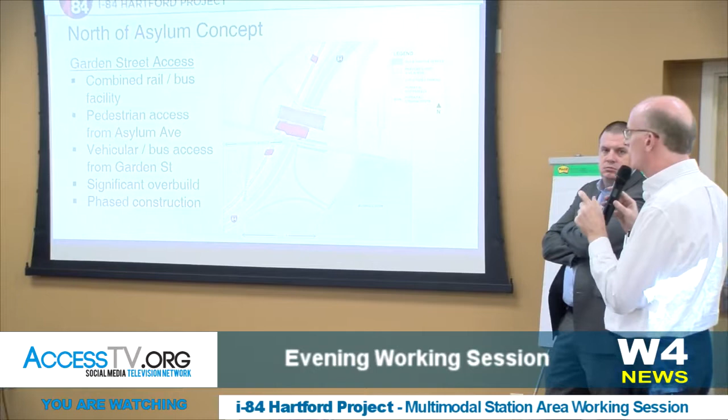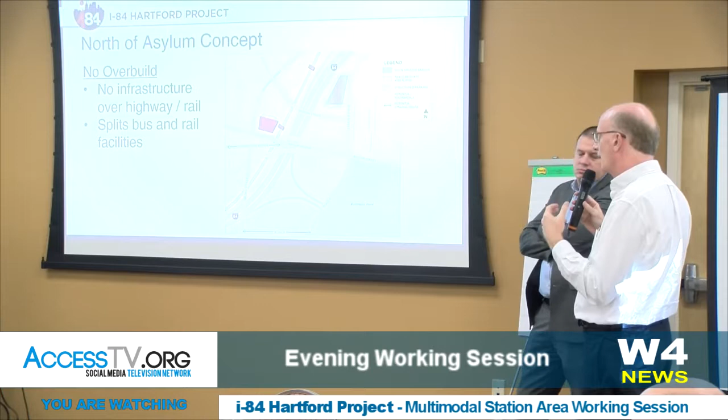Gina, can I add one further thought? Sure. Which I think we didn't mention—this is the question of the station, bus and train, over the highway or the rail right-of-way. We don't know at this point for sure that we'll actually be able to do that, from a security perspective as opposed to a construction perspective. So that's an ongoing conversation, and we don't have a definitive answer to whether that will be feasible or not, which is why we get to this concept.

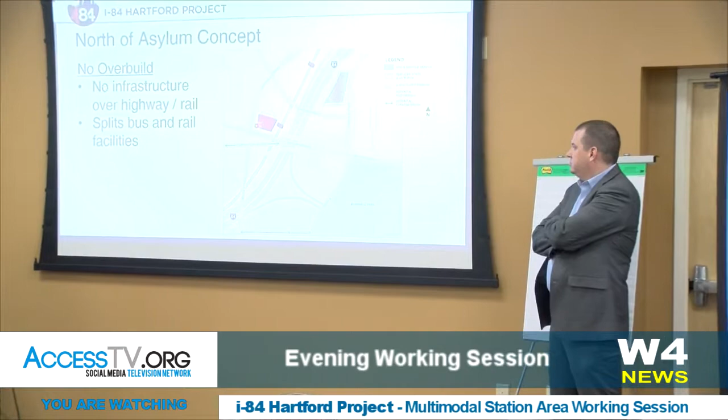So this is a rail station, again in the purple, just north of Asylum and east of Cogswell, that would be built off the tracks, and then a bus facility east of where the highway will be going, so on solid ground. This allows for construction immediately of either facility. I think the drawback is that it does split the bus and rail facility, so it wouldn't be a multimodal station.

But then I think the question needs to continue to be asked: how many transfers between bus and rail do people feel would occur? I think that could be a good discussion point also. Any ideas or feelings on a split facility?

Oh yeah, we have one. Just the concept of trying to get people out of cars, and thinking that in the optimal world, people would be coming by bus to the train station and leaving the train station by bus or some other mode instead of the private car—that, in my mind, is the most optimal goal to try to reduce traffic, gridlock, and smog and everything else.

The scheme obviously would put a lot of pressure on Garden Street and the connection because of that, and how you get people—if they're coming from cars or from the bus station—up to the transit center, the train station. How do you make that connection?

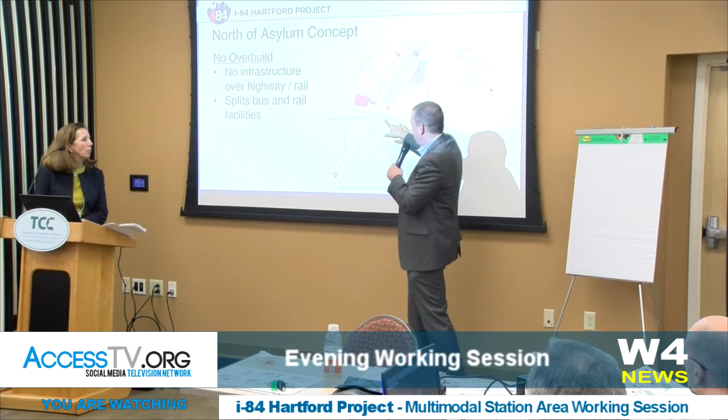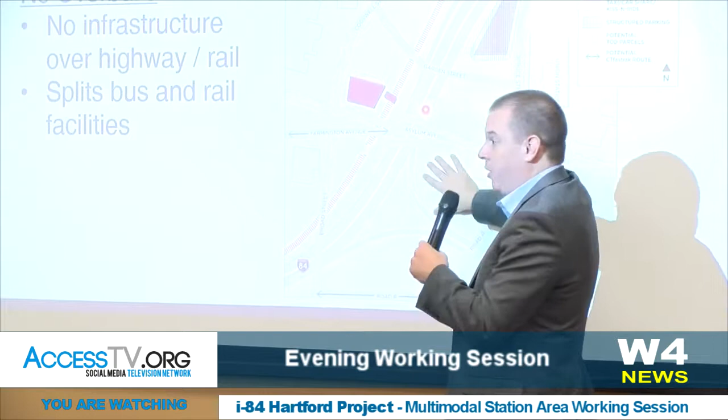The other part of this that has to be contended with is that you'll have a 200-foot gap on the north side over the highway that has to be contended with, probably as open space, and then a 300-foot gap to the south with the train platform and the highway combined, which is almost as long as a football field. So mitigation of that condition is really important, and that's why getting an experience coming up Asylum that's designed, maybe with terraces, but certainly with lots of amenities to get people to make that walk along an active frontage before you get to the highway, ideally. But these gaps just have to be mitigated in terms of the experience along the highway overbuild area.

Another kiss and ride, so you have to take a little road to get to the kissing area. This shows a little road from Garden Street down to a drop-off place at this location. What's not shown here, and I think Casey was just indicating it, there are a couple bus routes that use Asylum Street that would continue to use it. So you could have some bus connections, but the buses that terminate at Union Station right now would go into this bus facility, as would the intercity buses, the Peter Pan and Greyhound buses.

And you've taken away the bus lanes on Asylum. I don't know that we purposely did that - we could still have buses stop along Asylum.

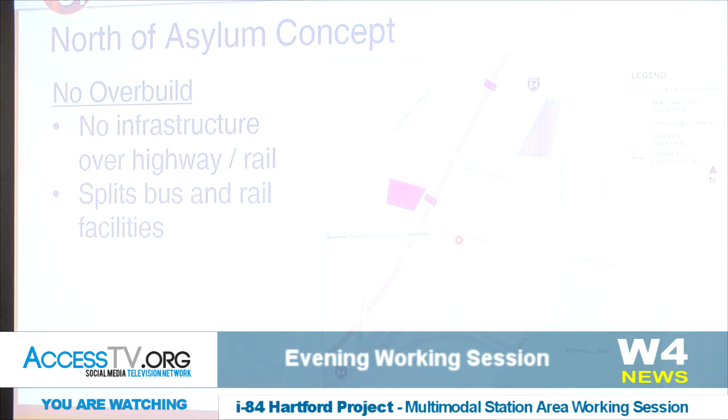Any comments on this concept? Any additional comments? We'll move to the south side.

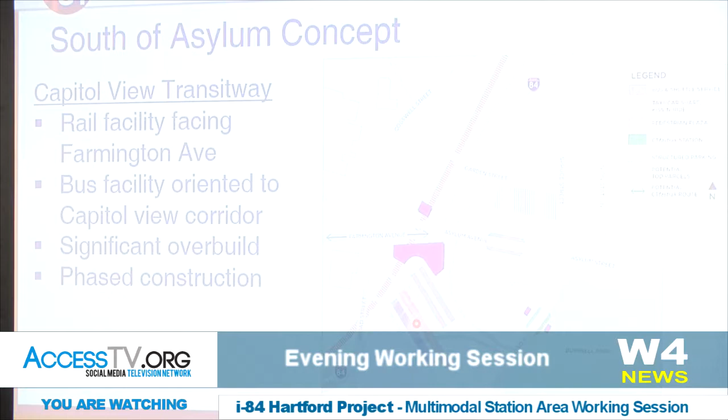Do we have any comments? One of the strengths of this scheme is the open space connection, a view corridor connection from the Dome of the Hartford down to the Dome of the Capitol. One of the challenges is the nature of that connection and the experience on the street, having bus facilities flanking on either side, not a very walkable mixed-use street in terms of activity. So we want to revisit that - if the conceptual power of that move is important, do we think it wants to be more than just a service drive for the transit facility, or could it be more? And then the opportunity for development flanking it, what are those connections and how is that integrated into development that strengthens the whole street network on the edges? But one of the great things about this one is using the southern station to again fill that gap over the highway along this portion to really connect the Farmington and Asylum Avenue corridor.

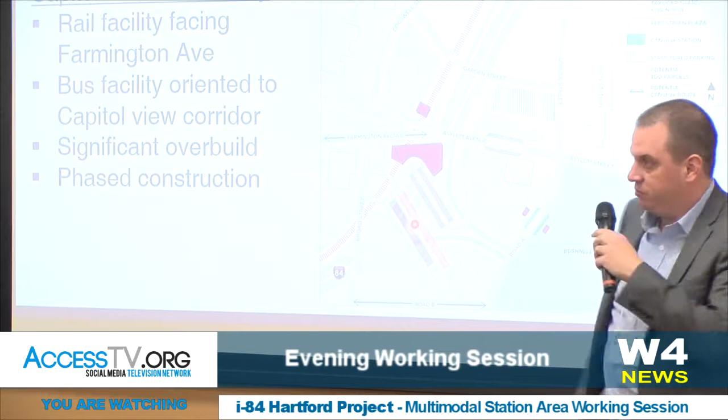This also has a connection to CT Fast Track, one of the alternates being considered in a tunnel option. So a new Road B, and then CT Fast Track would continue up on Road A. This would be the station before it continues into the downtown area. The other station concepts on the north side would also accommodate CT Fast Track, but along Asylum Street like the route currently goes. So this does provide a more direct connection to one of the alternates being considered for Fast Track for the dedicated way.

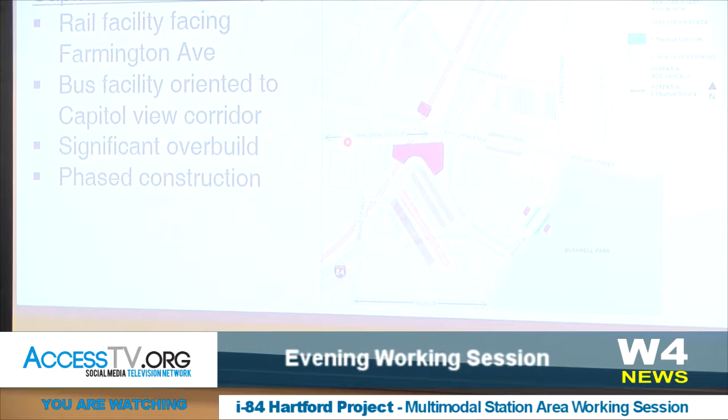Quick question, Gina - does this concept work better with the Farmington Avenue network extension? Well, do you want to address that? We did discuss that. I think one of the things true of all these concepts with the station south of Asylum is they need to be connected to many of the variables we talked about earlier. Does Farmington continue through? I think so - we have one scheme that shows Farmington continuing through like this. We have other options showing a connection from Broad through to Bushnell Park west, which would mean this alternative would need to be adapted - it's not perfectly clean but it could be adapted to accommodate that. I think the alternatives north of Asylum are relatively predictable because we're fairly fixed on what the network looks like there. But because there continues to be a fairly significant number of variables south of Asylum, that's something we need to think about for each of these alternatives. The other point I'd make about this one, which applies to other alternatives as well, is just the quality of Broad Street.

I think we've put a lot of effort into creating Asylum as a great street. Broad Street is clearly a terrible pedestrian street today because of the ramps and the whole infrastructure there. I think it's going to continue to require attention as we go forward in terms of what that experience is for a pedestrian coming through here. As we think about bus infrastructure and access and all those other things, we need to think about that as well.

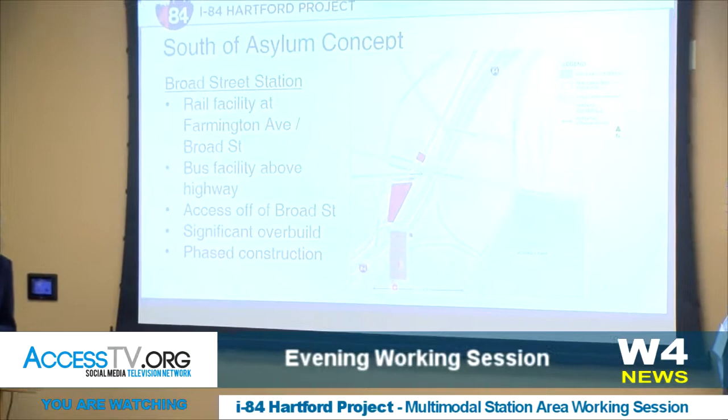Okay, so our second south concept, Broad Street Station. Access is in and off of Broad Street. The rail, again, is the pink icon. The bus is laid out more in a north-south direction, just south of the rail, so that you would have a multimodal bus and rail facility with bus access at this point. And again, everything off of Broad Street.

This would be built over the lowered highway once the lowered highway is constructed. This gets to the point about the challenges of Broad Street, and whether it's right to have a big parking facility and bus station fronting on that edge towards Frogs Hollow, or if it wants to sit somewhere else. The challenge is it's partially an overbuild today. Where are the places it couldn't be an overbuild, if there were other options that needed to be studied, and it just pushes it further into the development, which we're trying to keep focused along the frontage of Asylum and Road A, looking at the right places for private development, but trying to keep those transit components, the bus and train, as close together as possible in this strategy, while still allowing flexibility for development on the rest of the block to the south.

I think the other thing to say about this alternative is the bus facility is probably the furthest of all the options we've looked at from the center of gravity of downtown. So if you think about Union Station, and many people coming from this direction, that's probably a 5-7 minute additional walk to there. So of these options, assuming you're coming from north of the park, this one is probably the most remote.

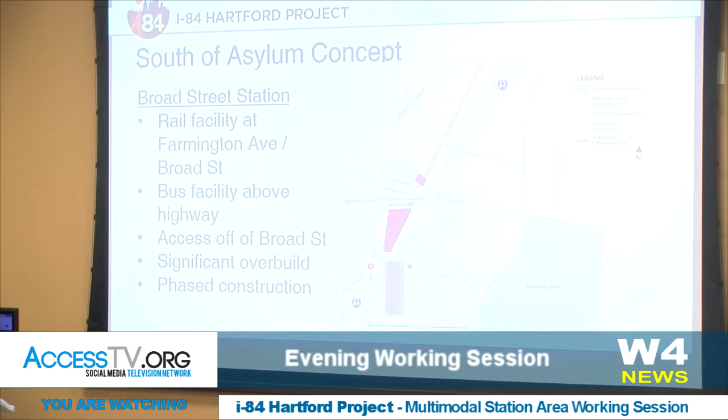Any other comments or questions on this concept? We just want to have a general discussion. If you have other input that you'd like, is there a station concept you prefer, and if so, why or why not? Do you think the station should be on the north side of Asylum or the south side? Do you have any suggestions or input on that? Any access concerns, or any other additional questions?

Jennifer likes to make me walk.

I just can't help but notice, is Broad Street closed a given? Every single one of your examples has Broad Street. We had to just pick a roadway network concept or whatever, that's the one we started with. So that should not be assumed. The more you see things in print, the more they become real. I've learned that before. But no, you shouldn't assume that.

Do you have any information about the people traveling to the bus station, where they come from and how they get there, whether they're walking or driving? We do have some information on that. I don't have it right off the top of my head, but we do have some. Guiding the location, I would think? Not to that degree, no. Not enough to really say it should be north or south. Not to that degree, there's not that kind of data out there.